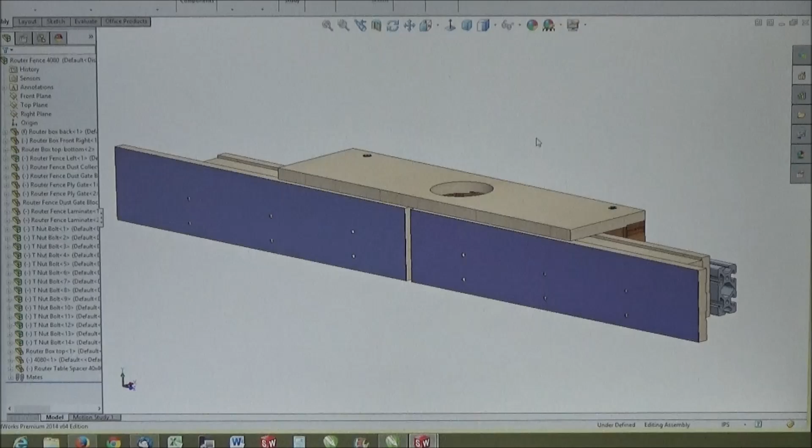Current router fence, this hole up here is for 4-inch dust collection. It works fantastic, I love it every time I use it. I don't have hardly a speck of dust or debris when I use this on my router table. And it slides on and off nice and easy onto my extrusion.

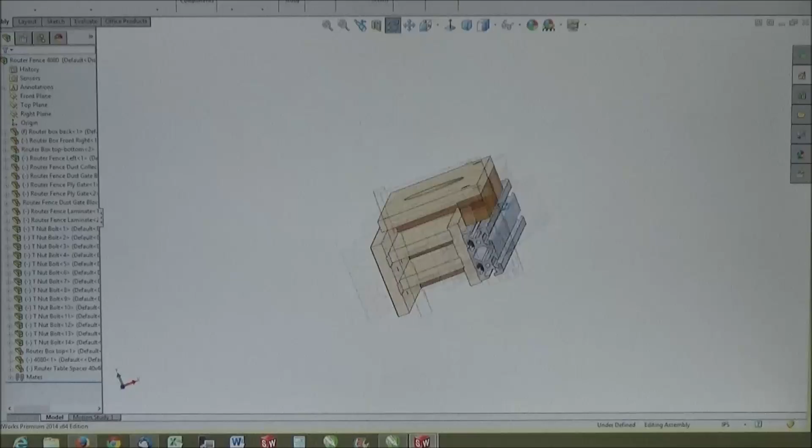Okay, so that's my current setup, this is what I got going now, or what I want to get going now, I should say. And the reason I want to get going is because I have these JessEm

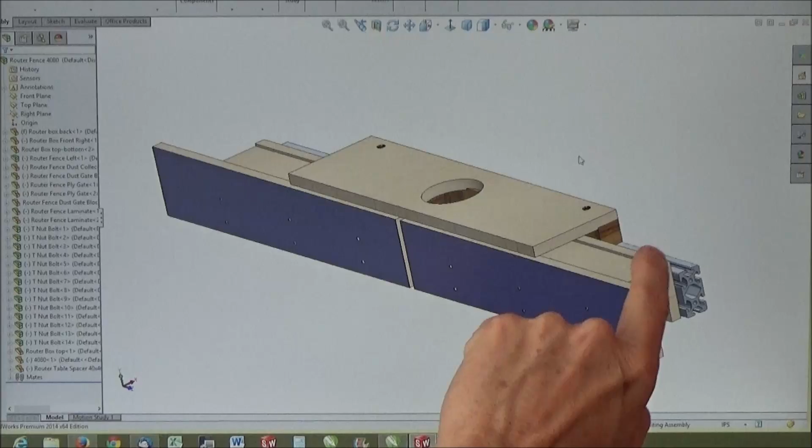JessEm table saw guides that just work fantastic with our fence. The problem is that I can't use them on my old router fence because this is too thick. If I were to bolt them back here on where they belong, I've eliminated all that possibility because of the way things are set up. I considered making this smaller, but even so, this distance right from the back to the front here, there's not enough adjustment on those arms to make it work.

So that's why I've come up with this new design, and with a little help from Alan, we've decided to change this side of the fence basically into like a crevice tool. And I think that's going to work well, but we're going to find out here.

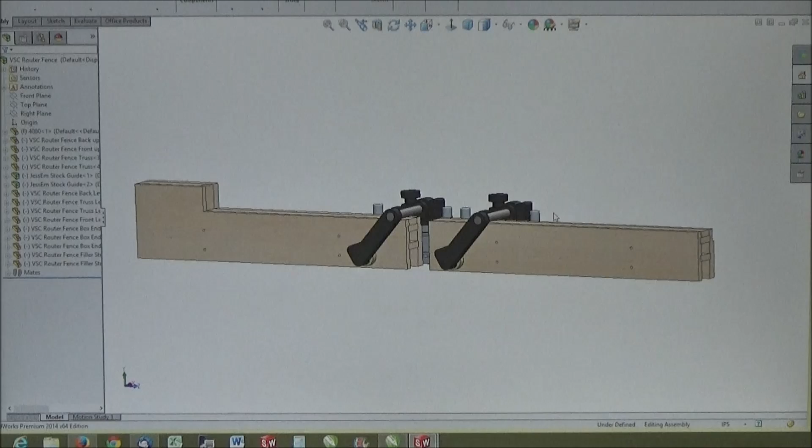So you can see there's my rendition now, and there's how we're going to make our connection to my central dust collector. 4-inch hole back here. All right.

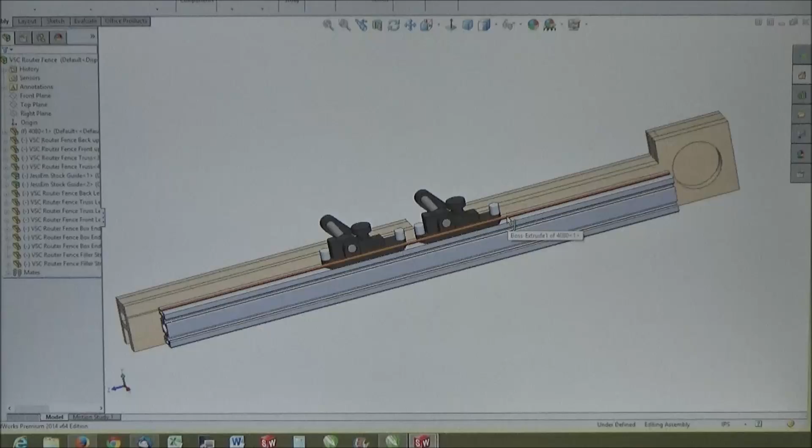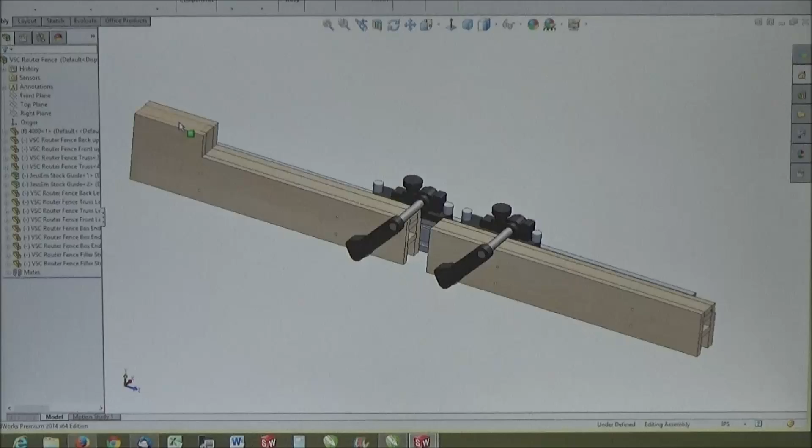So there you have it, pretty simple really, but now you can kind of see a little bit here underneath. There's the exhaust. So everything is going to run right up these tubes basically into the exhaust in the back here.

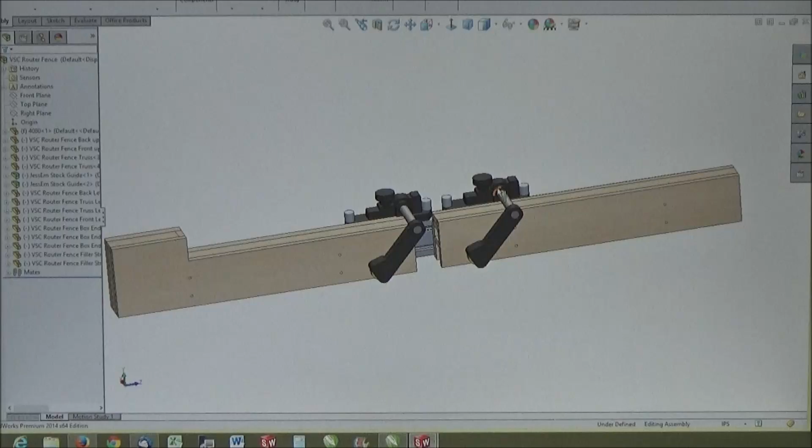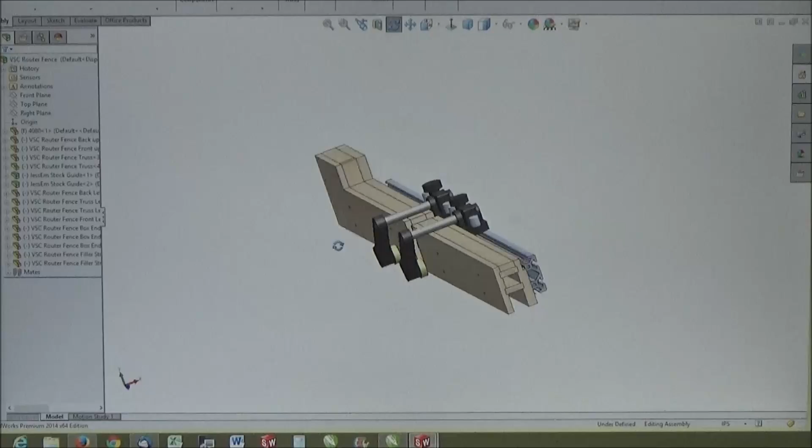Let's get going. Alright, just quickly a quick look at my old fence and how it worked. So you see that adjustable opening I had here, depending upon whatever size router bit I was using, I could close this up and get this fairly tight, and it worked well.

Then the other thing is I could also take and center my 4-inch dust extraction hole right over the work, wherever that happened to end up being. Usually it's pretty close all the time. And then you could reach in here and tighten up your flathead screws to the extrusion and lock this in place. So now that won't move.

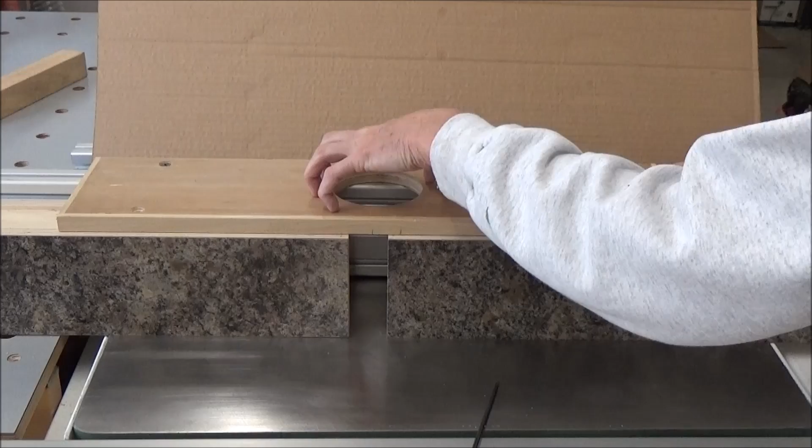And now you can, so I like the adjustability, I want to keep that part. I wanted the exhaust going to the back, and I wanted the ability to slide them on and off my extrusion. Okay, so I'm going to get this one out of the way.

First I want to tighten some things up here so they don't fall on me. And I'm going to get this out of the way.

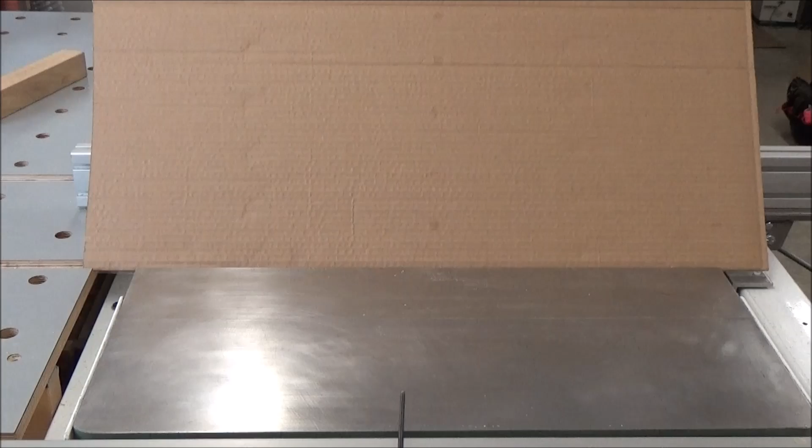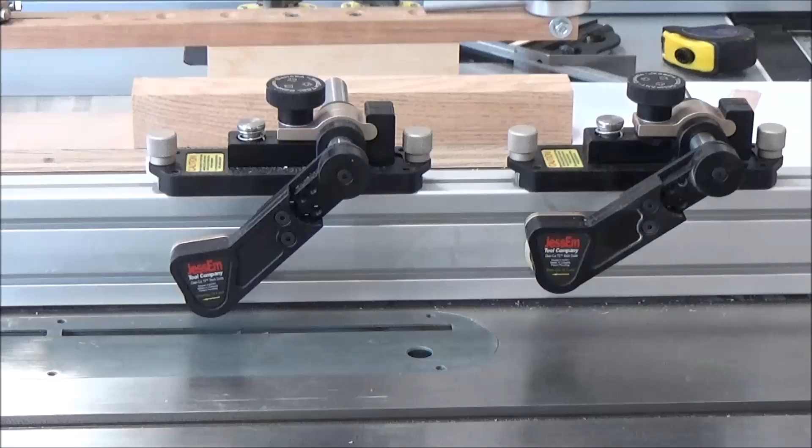So behind the cardboard, I've got my JessEm stock guides here, and you can see how they're set up. They just attach to our fence, and it's so easy. And you can remove them if you don't want them, and put them away. It's going to be a fantastic accessory for our fence.

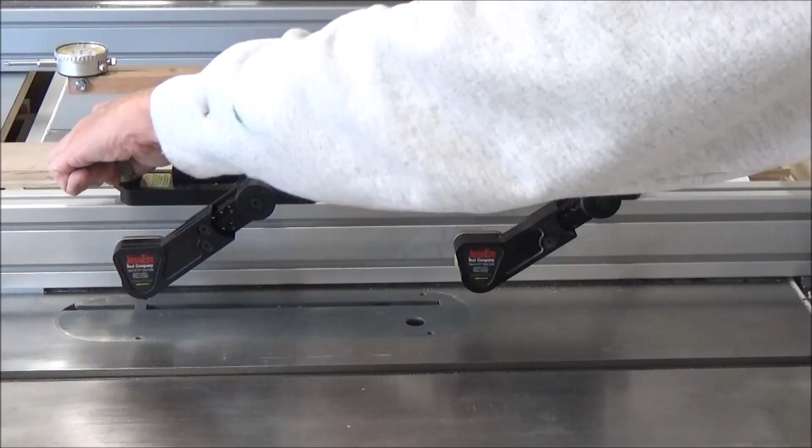Let me widen this out just a little bit here. So I want to set this up for a 6-inch rip about. Lock that down, that one's locked. That's it, that's all she takes.

So let me get this dialed in here. This is one of my, I guess I'll call it an accessory fence. So I'm just going to double check to make sure that the pointer is dialed in. And that it is, 6 inches. Okay.

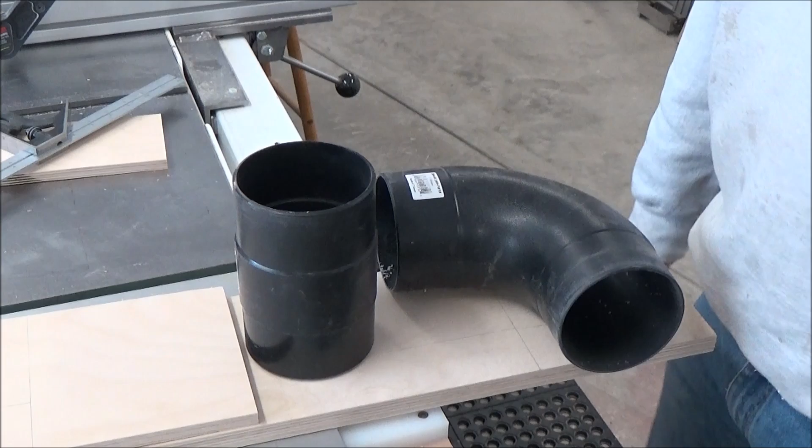Alright, I have two possibilities here for connecting my dust collector. The first one is just a straight tube coming out the back here, and then having the hose hook up here. The other is a right angle 90 degree, which gives you the flexibility of, if you're up here, turning it slightly so that the hose comes off of it and lays on whatever table you might have.

And for me, that would be my ultimate work table back there. I can have that hose come off of this and lay on the table, rather than before it was just kind of hanging out here in midair. So I'm going to go with this option.

I'm going to take this one and actually just trace the hole on my piece here, and I'm just going to eyeball this as center, right about there. I've got a 6x6 square here. I'm going to shade it to the bottom a little bit, about 3/4 of an inch from the bottom, so I have enough meat there. And I'm eyeballing the center, something like that.

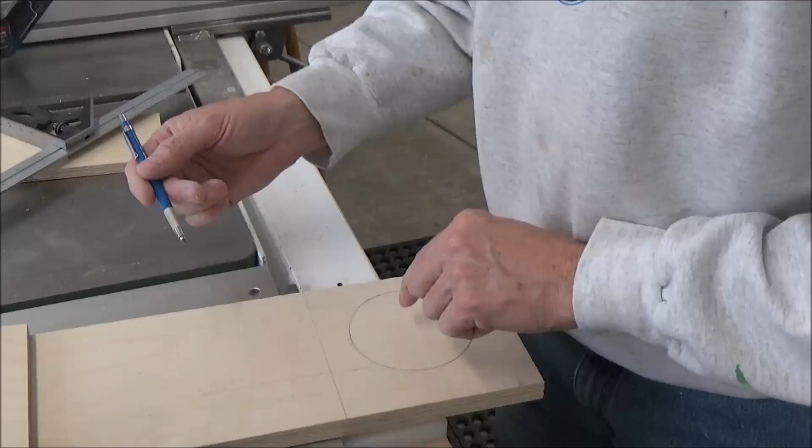And this is my 3/4 stock, this is my back piece. So that looks good. May have to shift this over just a little bit, but what I'm going to do now is get a compass, set it up for this diameter, and then that way I'll be able to locate my center hole with a center punch. So let me get that set up here.

Okay, test hole cut out of a piece of scrap melamine I had. That is beautiful. Nice friction fit. I can pivot it if I need to just a little bit, but it won't fall out. So I like that.

Try the other end here. A little looser on the other end, but that's okay. Yeah, and the straight piece, that's too tight. I guess I could get it in there if I had to. Yeah, it'll go.

Alright, I like the fit. I'll cut my hole in this, and then we'll do the other operations that we need to get this piece cut to size. You can see where I got my layout lines here. So this is going to be my square end. I'll cut that hole and we'll be good to go.